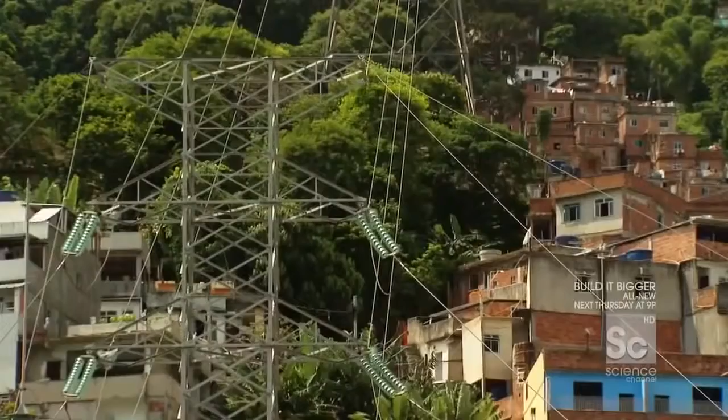Yes. The city has less than 4 years to generate enough energy to power 2 marquee events. Their solution lies 3 hours north of the city, where they're building a massive hydroelectric power plant deep in the mountains. So I've just arrived in the town of Sapucaia, and I'm about 100 miles outside of Rio. And this town, sitting on this body of water, that's the site for the new hydroelectric project. One of the largest infrastructure endeavors on Earth. The Anta and Simplicio project is a job site larger than Manhattan.

Workers here are reshaping some of Brazil's most difficult landscape in order to harness the energy from this, the Paraíba do Sul, a nearly 700-mile-long river that will supply the hydroelectric plant with enough water to fill 1,000 football stadiums. But the location of the river is the project's greatest challenge.

Now, the issue is if they put the hydroelectric plant right here, the reservoir required to feed this plant would cause a big flood. A flood so large that it would destroy all of the forests here and require this entire town and 2 others to have to relocate. So instead of moving the people, what they're going to do is move the river.

To save the town of Sapucaia, engineers are doing something incredible. Changing the course of 16 miles of this winding river in one of the largest water-moving efforts since the Panama Canal. Starting with a dam, they're diverting the river through 13 canals, 5 reservoirs, and tunneling through 7 mountains. Water will safely flow towards 3 of the most advanced turbines ever built.

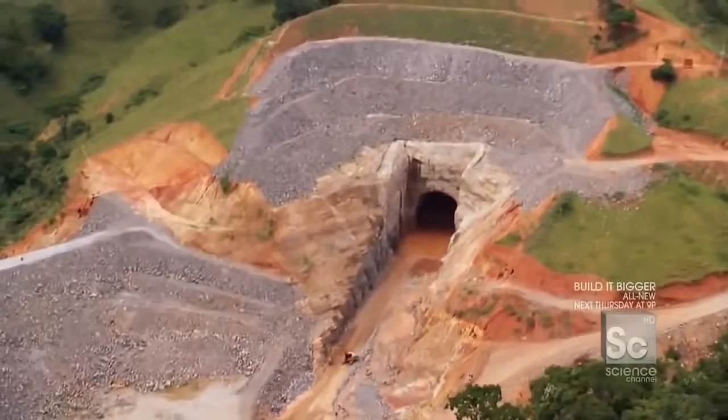Right now, I'm heading in to the mouth of the very largest tunnel. And having been in a number of tunnel projects before, I have never seen a mouth of a tunnel this big. Wow. This is the longest of 7 tunnels, spanning nearly 4 miles. And the further you drive in, the farther you get from daylight and the darker and weirder it gets.

In total, workers have to remove over 45 million cubic feet of rock, enough to cover Central Park in over 1 foot of earth. Going in. With the weight of a 240-foot mountain above, the team has developed a safe way to build one of the largest tunnels in the world.

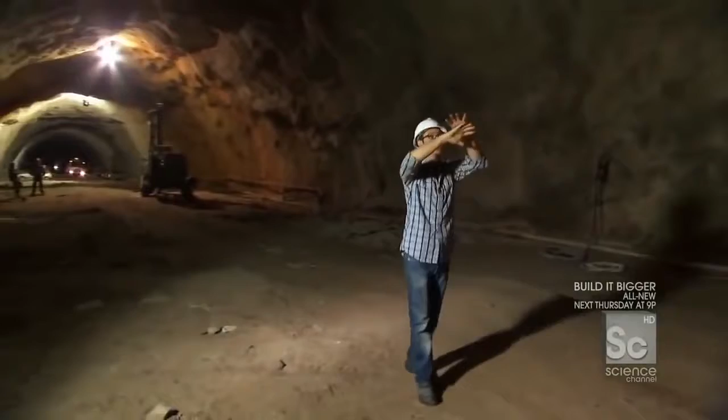It's a two-step process. Step number one is what you see they've already done. They blasted out this entire 26-foot tall semicircle. The second step is to go straight down. So basically, we're going to drill holes and blast down an additional 26 feet. Okay, and so how many holes do we have in this field right here? Here we have 52 holes.

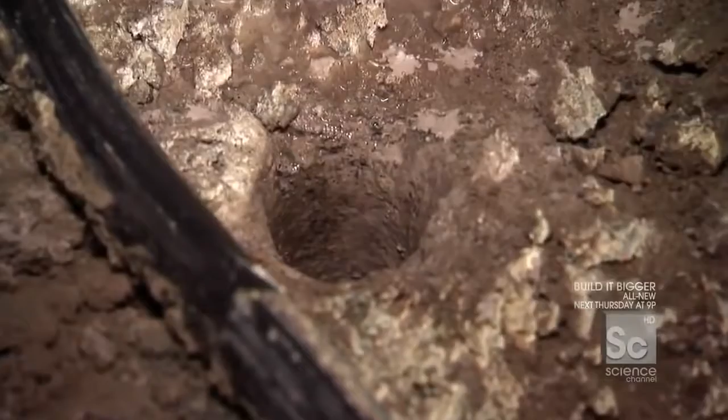52 individual holes. Yeah. And how much explosives are you putting into each individual hole? In the middle, we put 40 kilos per hole. So when we're done today, this will look like that. Correct. Exactly, yeah. We're not using a shovel to do it, are we? What we're using is a liquid explosive. Each 20-foot hole is filled with nearly 90 pounds of the stuff.

Okay, so Marcel, he's holding a hose connected to a truck, mixing together explosive liquid. Yeah, it's a liquid. It's a mix. So it's like you have to put in a little bit of oil, a little bit of vinegar, and you make an emulsion and it makes your salad taste good. This is different. It's not salad, it's a bomb. Correct.

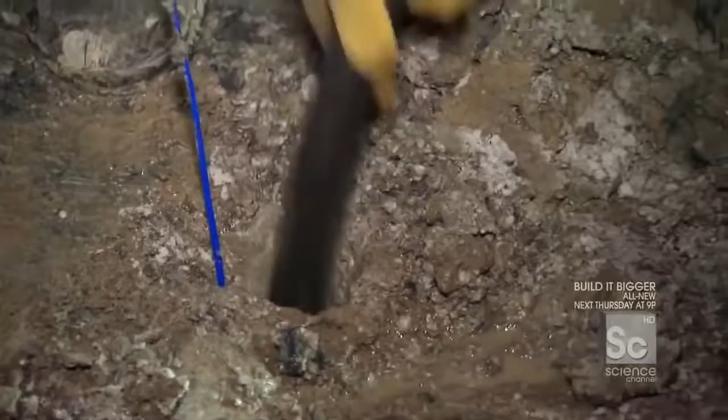Whoa, there she is. This kind of tapioca-like gooey substance is actually the emulsion, the liquid ammonium nitrate, the water, and the oil. This is a bomb. It's explosives. I have a hose full of it. All right, going down, all the way down. Made on site, this explosive liquid emulsion is more stable than dynamite. Okay, I'm at the bottom.

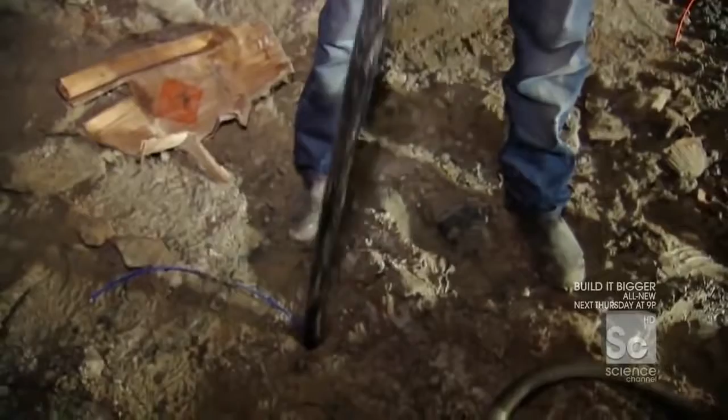Give me the juice. It fills all the empty space in each drill hole, giving the explosion the maximum force needed to break up the rock without causing a cave-in. So as the explosive comes out of my hose, we're slowly pulling it out, filling this thing up. Is it full? Yeah. All right, so now we have 52 individual holes. Each and every one of them is loaded with a fuse and an entire column full of this liquid explosives. Now, we're gonna tie them all together and run away.

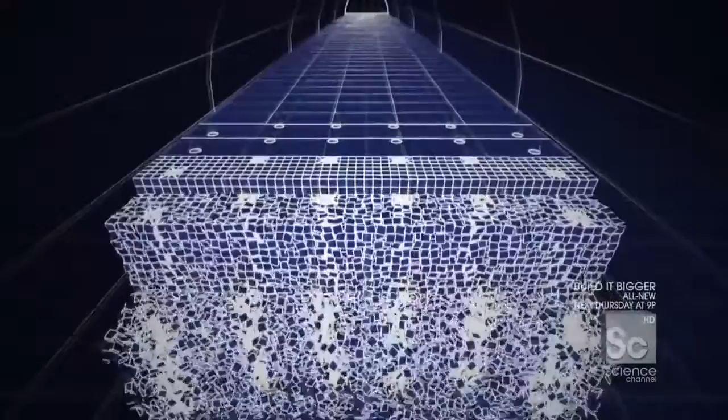The holes are dug in 5 lines. Blast engineers connect the fuse in each hole with a series of color-coded time delays. Once detonated, each line of explosives blows up in succession. Like a wave, it pushes through the next 30 feet of rock. Okay, so Kaido, am I looking at the plan right now? Are we looking down? Yeah. So this isn't just one gigantic bomb going off. No, we cannot do this because of the vibration. If you explode everything, you will shake the tunnel. Bad idea. Yeah, it's not a good idea. Not a good idea. All right.

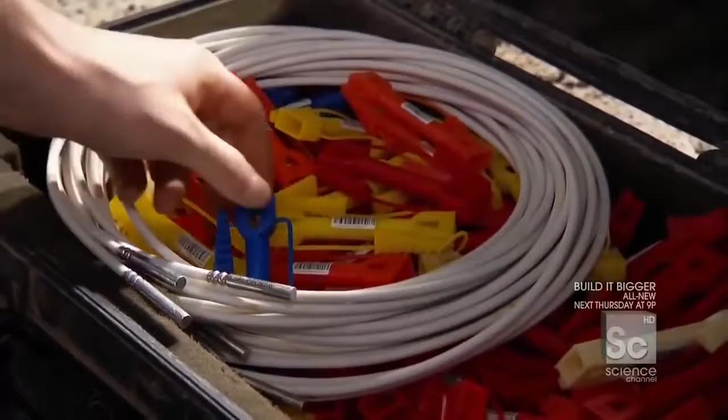Voila. Okay, so each color corresponds to a different delay. So which is which? 30, 30 milliseconds. 150. 150 milliseconds. And so basically by mixing and matching and combining these delays, we can kind of create the shape of the explosion we want. Yeah, that's it. All right, Jack Bauer, let's do it. This is what it's about, right?

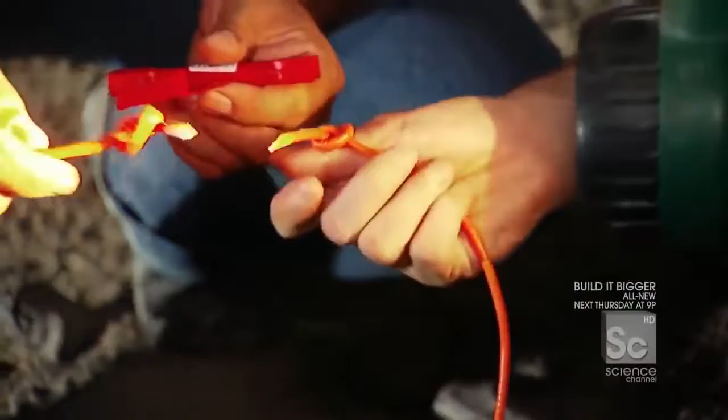Right below me is one column full of explosives. When it goes off, there'll be a 50 millisecond delay, then it goes on to the next hole. Okay. Stick it in, and now you can feel the wires touching the charge. And now I'll take this red piece, and it's in, okay? Live explosives. Let's get out of here. All 37 delays are now connected. The strategic blast pattern is ready to go.

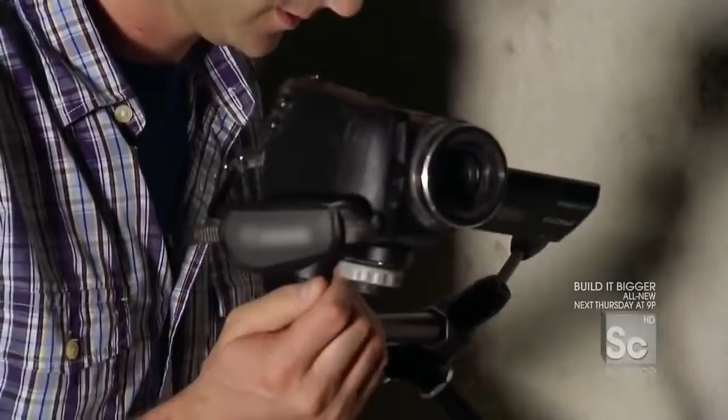So once we light the fuse, how long do we have? We have 7 minutes to leave the tunnel. Okay, so we're gonna evacuate the tunnel. Yeah. Getting all the lights, the crew, the gear, everything out. Yes, correct. But not everything is evacuating. The intrepid Danny Cam is gonna try and capture the moment for us. You see, the last time we tried this, our camera did not survive the blast. Hoping for a bit better luck this time.

All right, looking good. All right, you are set. All right, be careful where we step. Okay, that's a bomb. That's another bomb. Okay, so in my hand I have a stopwatch with 7 minutes set for the blast time. In my right hand, I have a lighter. Both are required to safely detonate a tunnel. So, okay, here we go.

Fuse is lit. Come on, come on. Philippe, get in the back, hold on tight. Jay, get inside, quick. Philippe, you're good? All right. Lights on. All right, here we go. Oh, emergency brake. The mouth of the tunnel is over 2.5 miles away, making it almost impossible to reach in just 7 minutes. We're gonna make a left here. Oh, good thing they told me that. Okay, gotta change gear. Sorry, dude. Our only way out is a small access tunnel located a half a mile from the blast site.

This is ridiculous. So I'm actually driving as fast as I can, but the roads are really crappy, so the idea is don't get a flat. Oh, come on. Come on. There it is. We're almost there. I can see the light. A minute and a half to go. Come on, car. Come on. Get up there. Come on, damn it. You okay, Philippe? Yeah. Woohoo!

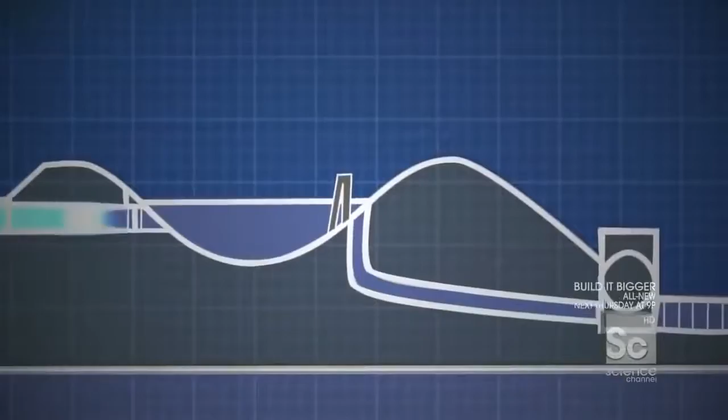To keep the lights on, the Anta and Simplicio hydroelectric project will supply nearly twice the energy that the city needs for the games. To generate that much power, workers are moving a massive river through a series of tunnels and canals, channeling all that water to an intake valve that directs the river to a powerhouse. As this enormous wall of redirected water comes out of the final canal, it now meets something called an intake, which is essentially like the drain at the bottom of a really big bathtub.

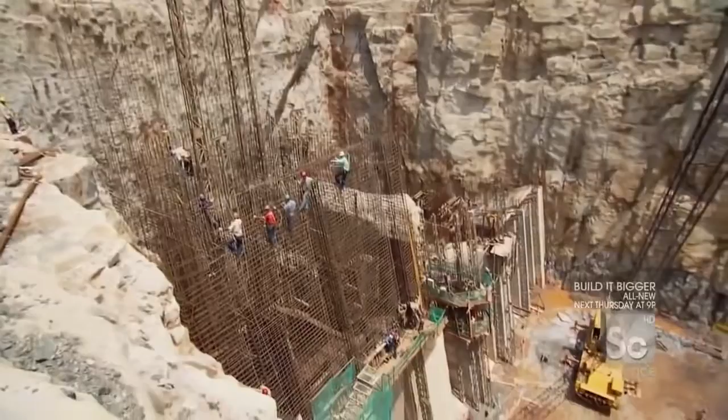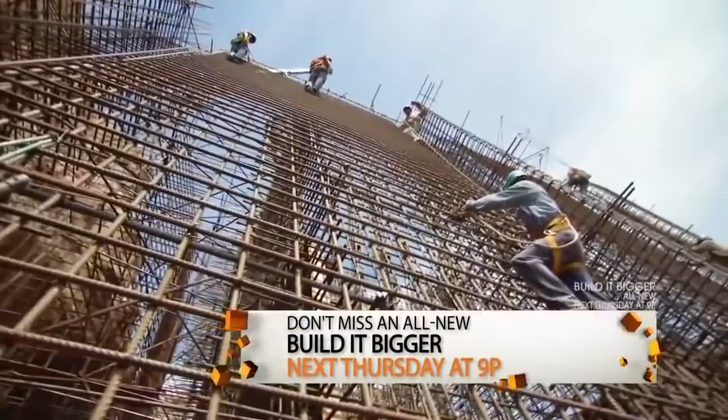But while the water drains out, something else has to hold back all that remaining water. Now we're talking about 780 billion gallons of water. What can hold back that much water? Well, it's gotta be a really, really big wall. This massive wall is over 100 feet tall, covered in over 4,000 tons of concrete. Its core is reinforced with nearly 75 tons of steel rebar, making it 100 times stronger.

So at this height, I'm basically at the midpoint of the intake. Water would be going in below where I'm standing, down into the hole. But up here, the wall that's holding back the rest of the water is right here. And the guys that are actually building this thing, giving it its strength, installing its rebar, well, they're doing that up there. Well, here we go.

We're off. This is one of the hardest spots to reach on the entire job site. One tied off. Workers have to climb a steep 79-degree slope. Not looking down. 10 stories up. All right, last couple. Okay. Woo! Top of the summit.

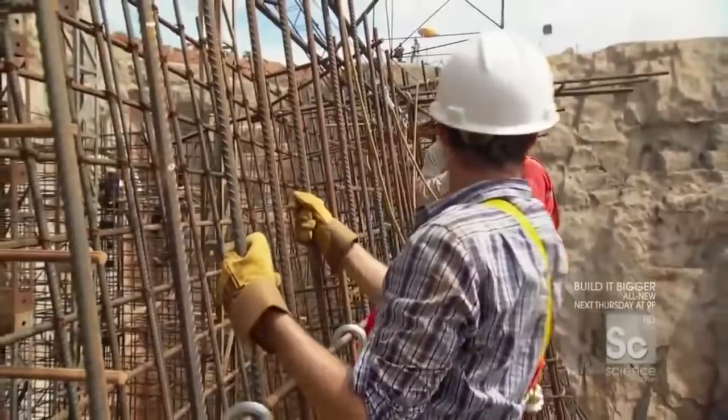See? So the crazy thing is, at the very height of the wall, the way to get more rebar up to us so we can finish this wall is like that. There's no room for a crane at the top. So a team of 6 workers hoist each 65-pound piece of rebar. Holy, you gotta be kidding me. Using nothing but 160 feet of rope.

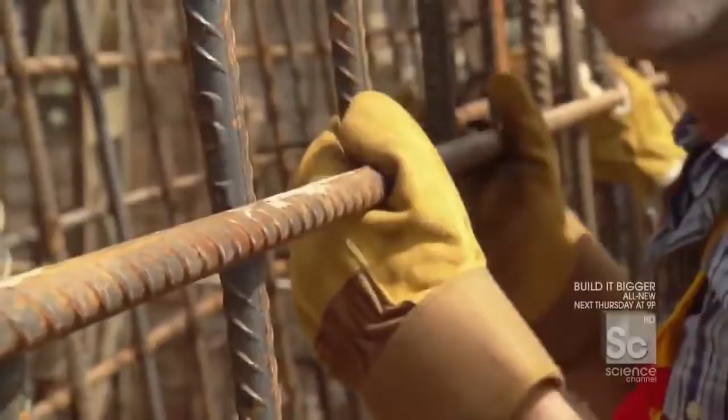All right, okay. Watch out, watch out. All right, coming down, watch your shoulder. Come down by me. Okay, we're at the right height. And now the rebar is generally where we want it, now we put on those series of rebar ties to connect this horizontal piece to this vertical piece.

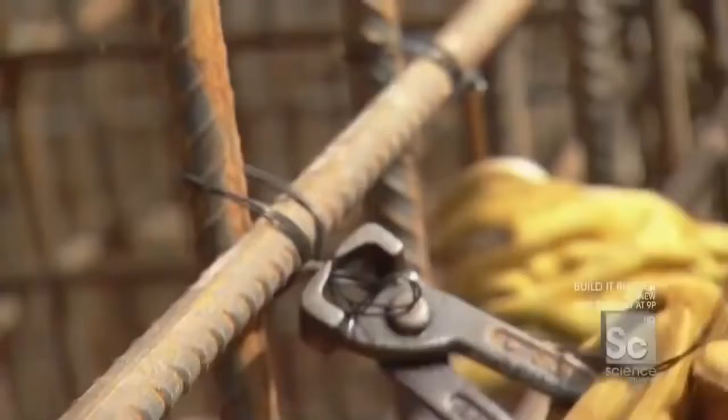Around the top. Bring in the tool, twist. When finished, this crew will tie together almost 5,000 pieces of rebar, creating a massive grid with over 17,000 joints that will stop a river in its tracks. Nice. Good stuff. Yeah!

So, why is everyone so happy? Why so much woo? Today is Saturday. Today's Saturday. I see. Which means tomorrow's no work. No rules. Got it. All it takes is a day off. Brazil just blows up. There it is.

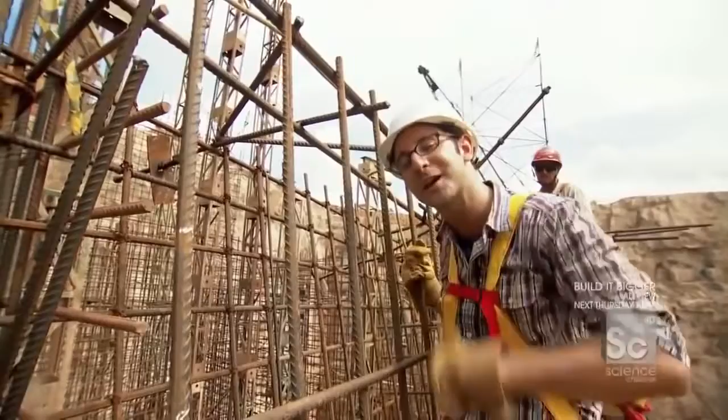Oh my God, it's like a prison break out here. Well, it just goes to show just how hard these guys have been working. 6 days a week, almost 16 hours a day to build what will be one of the most important pieces of infrastructure ever to be built in Brazil. And why? To make sure this city, when it houses both the World Cup and the 2016 Olympics, they don't have a blackout.

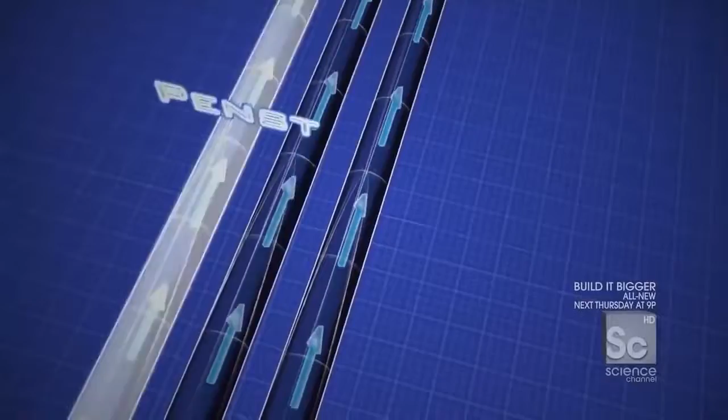Engineers expect a wall of water nearly 100 feet deep to barrel into the intake wall. After the water passes through, it drains at the base of the wall and enters 3 underground tunnels called penstocks, which begin with a 10-story drop to speed up the water. It gains momentum down a 7-degree slope, rushing towards the turbines. The faster the water, the more electricity they generate.

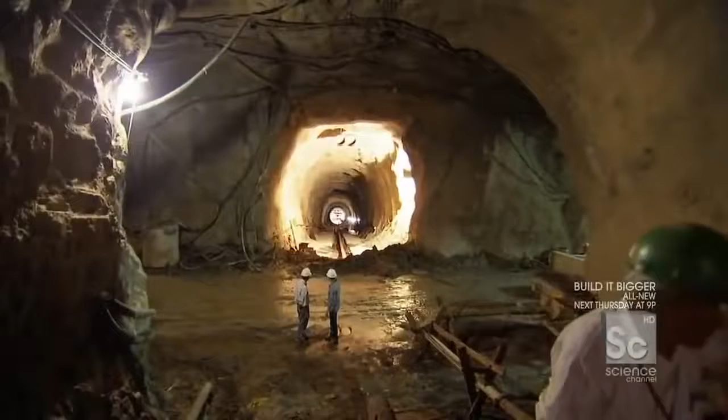So that's the turbine down there. Yes. And the central idea with the penstock is to do what to the water? Increase the speed and the pressure. Both needed to move the turbines. And so the water's moving how many meters per second? 10 meters per second. 10 meters per second, so that's like 20 miles an hour. Yes.

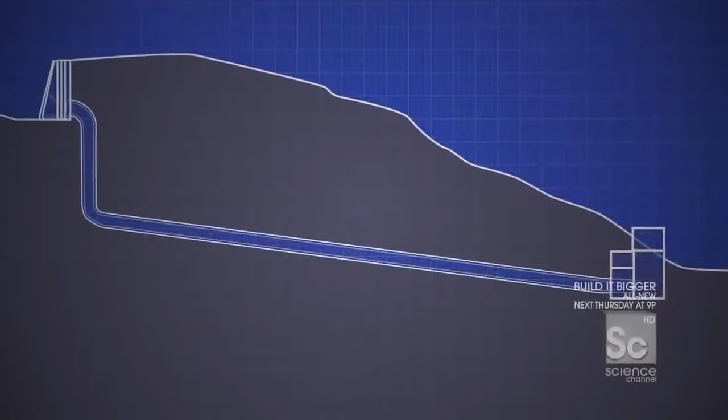Water moving that fast would tear away rock from the walls and ceiling. Its force is stronger than a massive ocean wave and capable of causing a tunnel collapse. To reinforce the penstock, workers line the final 350 feet with 50 massive rings, totaling 800 tons of solid steel.

Now, one of the fascinating parts of this process is they're moving a big, heavy object, but they're not using a crane because we're in a tunnel, right? There's no room for a crane. So rather than having a crane operator, we have a truck driver and an angry one. Let's go meet him. All right, here we go.

Hello, sir. How you doing? You know me? Anderson. Anderson. Isso. I'm Danny. Danny, nice to meet you. Are you nervous? 'Cause it's a heavy piece, we're in a tunnel. Devagar. Keep it cool. Let's do it. Rock and roll. All right.

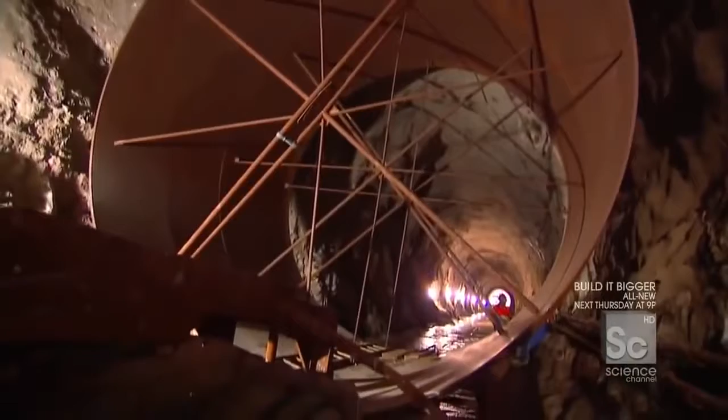The ring is attached to a trailer and is more than half the weight of the truck. It'll take everything this truck has to get it into place. Okay, so Anderson wants to crank the RPMs up because he's actually going to want a ton of torque so the weight of that steel piece doesn't actually drag the truck backwards. So he's letting the engine tune up.

Also, I might add, from afar, Anderson, very tough exterior, kind of tough truck driver appeal. But here in the cab, this guy's a teddy bear, huh? There he is. He loves it. He loves it.

All right, here we go. So we're popping it in gear. Wow. I mean, Anderson is basically smacking into the back of the steel ring and quite literally pushing it. It's a kind of a tight fit. Uh-oh. Oh my God, look at that. I think we're stuck. Are we stuck?

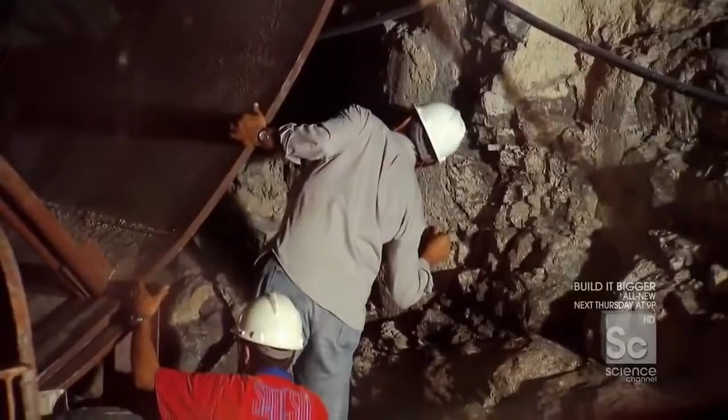So what happened? Esbarrou na pedra. You hit it? Is that okay? Agora tem que pegar a máquina, puxar. Smacked it. Well, it happens. I mean, if you're basically parking an enormous truck with a gigantic 16-ton steel tube, you might hit the side of the garage. Anderson did. It happens. Let's go check it out.

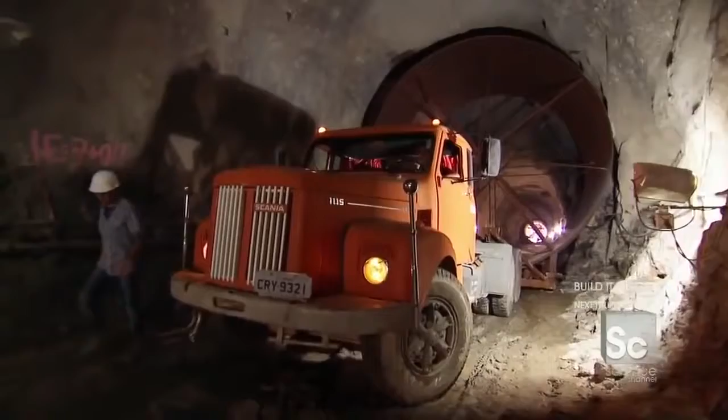It takes 3 days to secure each ring to the tunnel wall. And the crew has 3 penstocks to complete and another 146 rings to install. But for now, this operation has come to a grinding halt. So there's a flange on the outside of the steel that kind of protrudes out, and that flange somehow has gotten behind this bump out of concrete. So not only is it stuck on the side of the wall, it's actually blocking itself from getting unstuck. We're gonna be here for a long, long time.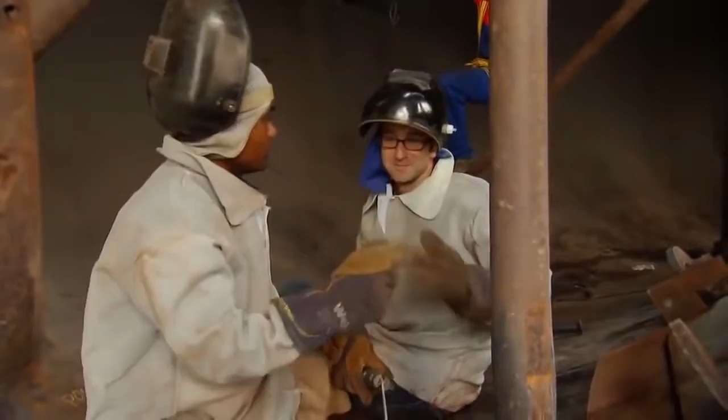Up next, sealing the most advanced turbine ever built with a 3,000-degree welding stick. Sorry. Right. If you touch the rod to any metal.

Brazil is the third largest consumer of electricity in the Western Hemisphere, with usage doubling in the last 25 years. This country is turning to its greatest resource, water. There are many different ways to make the electricity we need to power our cities. You can burn coal, you can burn oil, you can build a nuclear power plant, you can have a wind farm, even a solar farm. Now, for a country like Brazil that has 1/5 of the world's fresh water, a water solution makes obvious sense.

The Paraíba do Sul is one of over 120,000 rivers in the country. And for the last 3 years, workers have cleared a new 16-mile path through 7 mountains, removing 650 million cubic feet of earth, all to bring that water to 3 of the most advanced turbines ever built.

We are now at the final leg of this race. The water, now traveling at its maximum speed, is going to come barreling out of the steel casing, which will ultimately connect to this right here. This thing behind me is called the spiral casing, and this is where the water finally makes electricity.

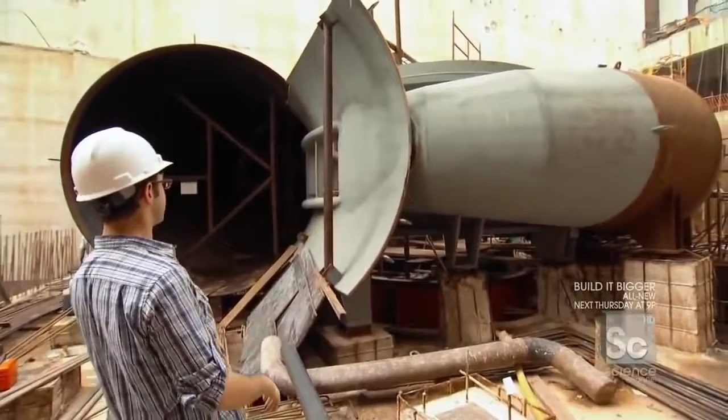It's going to spin around this, pulling a 360-degree turn, all the while rotating the blades of the turbine. The turbine acts essentially like a water wheel. As water rushes around the spiral case, it pushes 13 angled blades, spinning the 35-ton turbine and generating power. The challenge: keeping the water from losing speed as it flows around the tube.

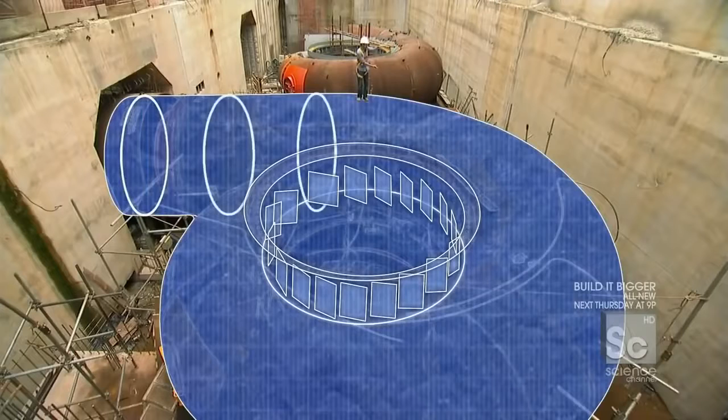The answer is the same thing that we use when we're washing our cars with a garden hose, right? If you pinch the garden hose, the water goes faster, right? So if we decrease the diameter of the hose, we increase the speed of the water. Same principle, just much bigger. The water comes into the spiral casing at a diameter of 13 feet. And as the water goes around the curve, the tube gets progressively smaller, starting at 13 feet and ending at 4 feet. So when the water comes in, it travels the exact same speed all the way around the circle.

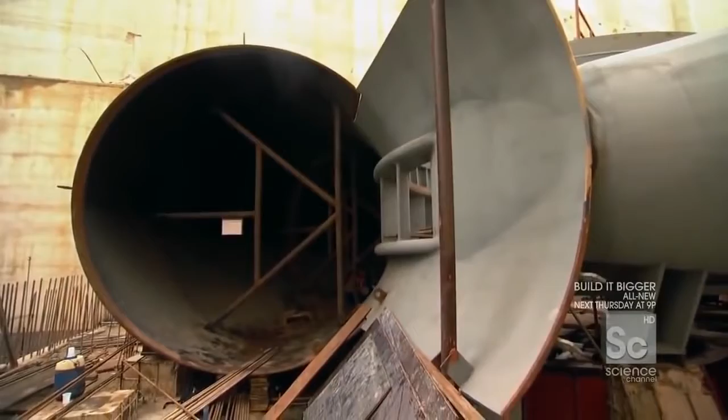The 62-ton spiral case is actually composed of 70 steel plates. Coming in, here we go. Okay. To make the turbine spin evenly, it must be turned into one smooth, frictionless surface by a team of 4 welders. All right. Your name? Cosme, I'm Danny. Cosme, you're the welder, huh? So what Cosme's up to is he's welding on these pad eyes. We'll put one on this piece of steel, we'll put a second one up on this piece of steel, and we're gonna bring it together in order to close the gap between 2 pieces of steel, weld it up, and make it one smooth, curved surface.

Okay, let's do it. Gloves? Cosme's welding stick burns at 3,000 degrees. And to protect against flame and sparks, these guys wear welding jackets made of fire-resistant leather.

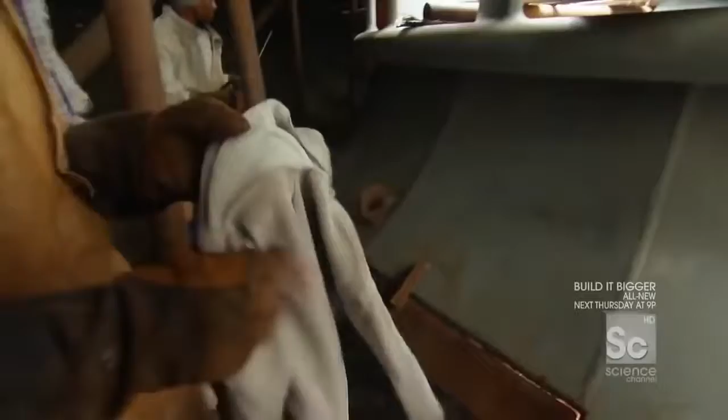Beautiful. Okay. All right, you show me how it's done. Put one arm in. And then put the other arm in. Cosme, are you showing me how to put a jacket on? Is that how much faith you have in my abilities today? All right. Oh, right. Sorry.

Right. If you touch the rod to any metal. These pad eyes are welded onto each steel plate to act like an anchor when they pull the steel together. All right, gotta get it in there tight. Get a nice little bead going right there. Good motion. Look at that go. Cosme! How was that? That was good, huh? Did I do okay? What do you think?

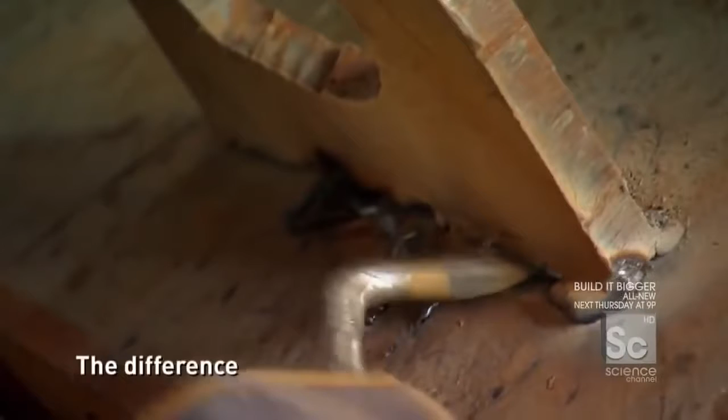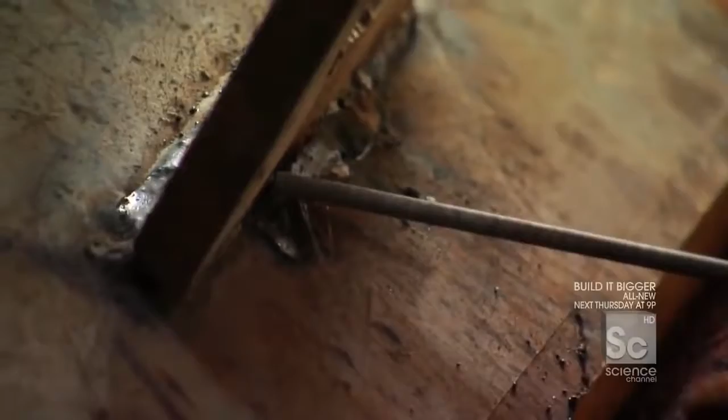The difference between yours and mine, yeah. That was hard. These panels will be pulled so tightly that each pad eye must endure 18 tons of force. So we're gonna have to have more weld. All right, so Cosme's gonna have to finish the thing up.

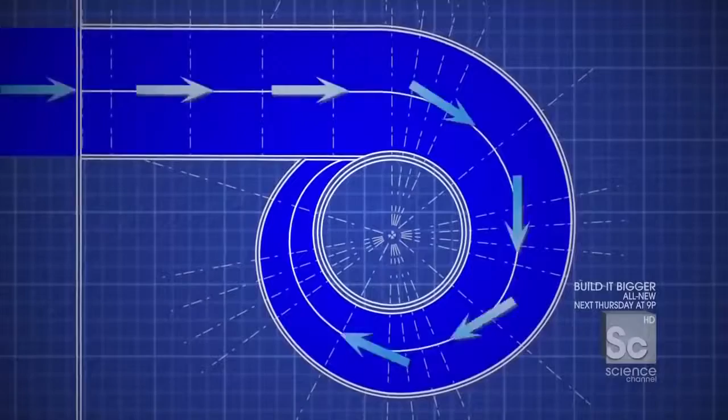Now, next step is the guys will put chain blocks onto that pad eye. Once we put tension in the line, we can pull the pieces of steel closer together, because in the end, they're taking these different individual curved segments and making one long curved tube that lets the water rapidly turn around and spin the turbine. 79,000 gallons of water will rush through the spiral case, with nearly the same force as a rocket during liftoff. Powerful enough to rip the 1-inch thick steel plates wide open.

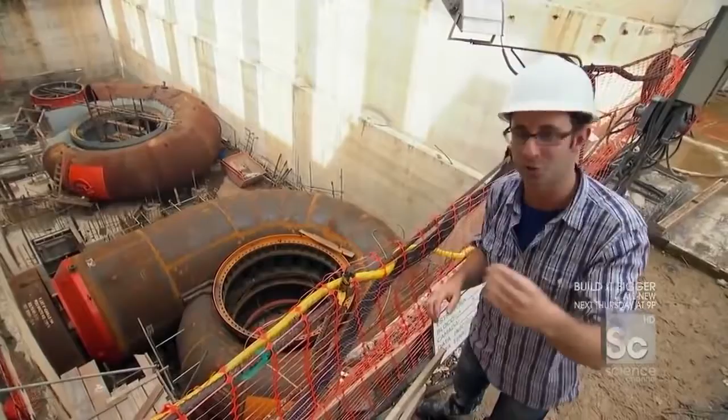Now, to prevent that, the crew must entomb all 3 cases in over 2,000 tons of concrete. But they have to first make sure the cases don't leak by filling them with water. The problem is, you can't fill it with water if you have holes in it. So right now, what we're gonna do is plug up the holes of that donut to let them fill it with water. We're gonna do that with this big cylinder right here. The plug is actually a 32,000-pound steel ring. All right, let's shackle it up. And once lowered into place, it will seal up the spiral case, making it watertight.

Okay, so everything in Portuguese is different from English, even the crane operator instructions. So, for example, going up with the crane? Para cima. Cima. Para cima. And for going down? Para baixo. Para baixo. All right, so he gives us a thumbs up. Okay, bring her up. Here she comes.

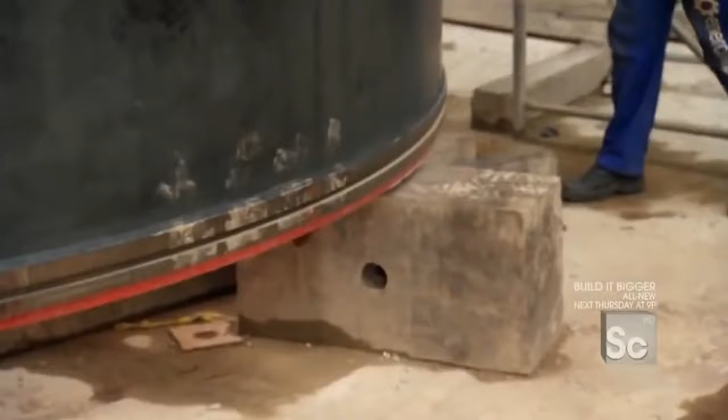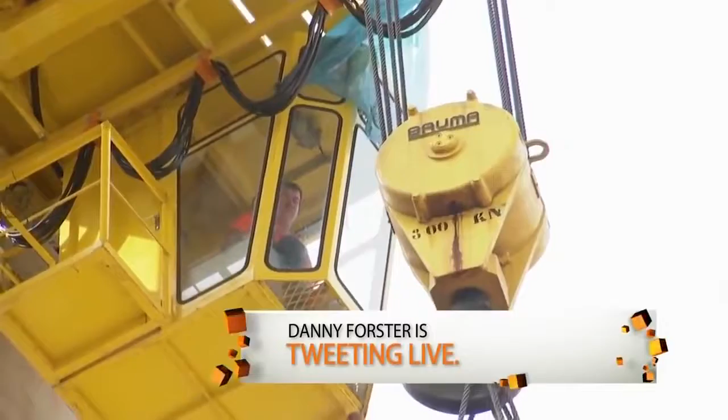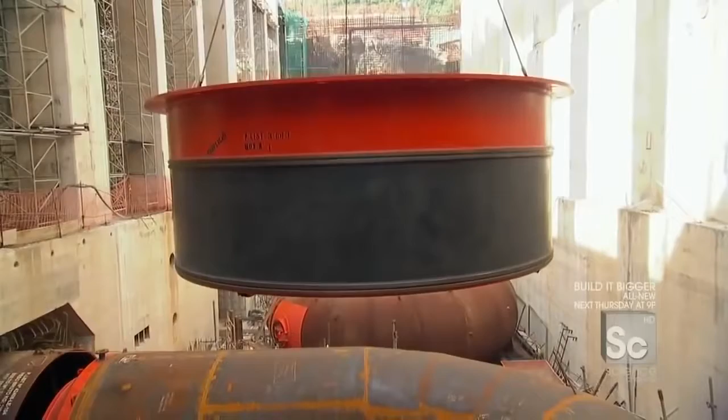16 tons, wide load. All right, clear the way, we're gonna start traveling. Now, one of the key things to keep in mind when you're flagging a crane operator, no matter where the piece is, no matter where you are, you have to maintain visual connection with him at all times. So, as the piece moves, I have to move with it to make sure we're always looking at each other. And now for the delicate part, we're over top the spiral casing. Each spiral case takes workers 2 months to assemble. Very slowly. And if this solid 16-ton load falls, it would crush the case like an empty soda can.

Now I have the piece above the hole. There's moments of more progressive refinement. We got it this far, and now we're gonna get even closer as the piece gets closer to its final position. Okay, here she comes. Come on down. And now for the final few adjustments. Here, literally, millimeter by millimeter. You can see it's just gonna clear the threshold with absolutely no room to spare.

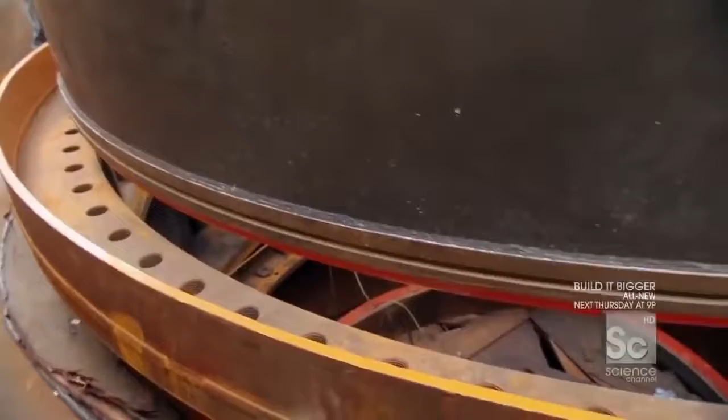Look at that. With only 1/64th of an inch of clearance and a crane operator perched 90 feet up, there is no room for error. Come to me a little bit. Keep it coming. Stop it right there. Good. All right, so now we are lined up all around. The circle should fit into the hole.

Check it out. Everyone seems happy, so we're good. We're successful. Obrigado. Cool stuff. My first time operating a crane via hand signals. Did a decent job.

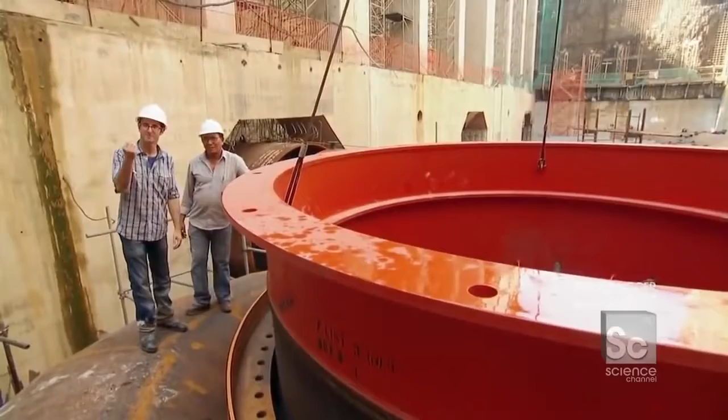Coming up, clearing out nearly 4 miles of canals. So these are the explosives right here. Calls for some serious firepower. Oh, the noise is so bad. You can hear it's like bomb-on-bomb action. But first, how many hydroelectric dams are located in the entire country of Brazil? I'll tell you the answer after the break.

Here is the trivia answer. Brazil has 450 hydroelectric dams, more than twice as many as in the entire United States. Rio has 1.3 million people living in slums called favelas. 20 years ago, these neighborhoods had no electricity. Today, their power comes largely from direct taps into city power lines, an extremely dangerous power source. But thanks to the 2016 Olympics, this situation is about to radically change.

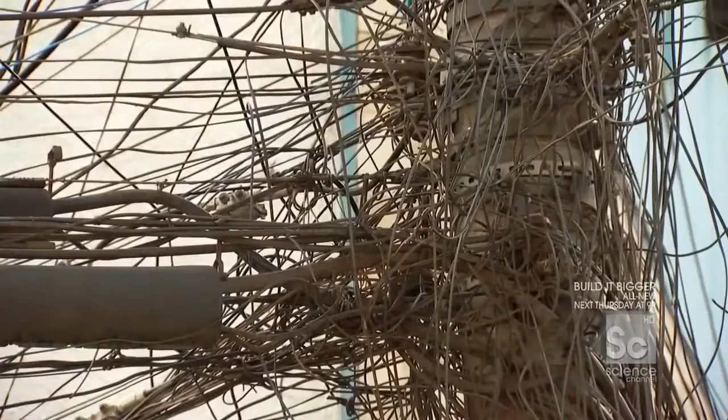One of the more fascinating reasons why Rio beat out their competition of Madrid, Chicago, and Tokyo is that winning the Olympics isn't just about showing off a shining, gleaming city, but rather it's also about using this as an opportunity to transform a place. So this favela, one of the poorest neighborhoods in Brazil, is also going to benefit from the games. All the new infrastructure, all the new construction, all the new housing will affect this area. So winning the Olympics isn't just about sports, it's also about transforming a city.

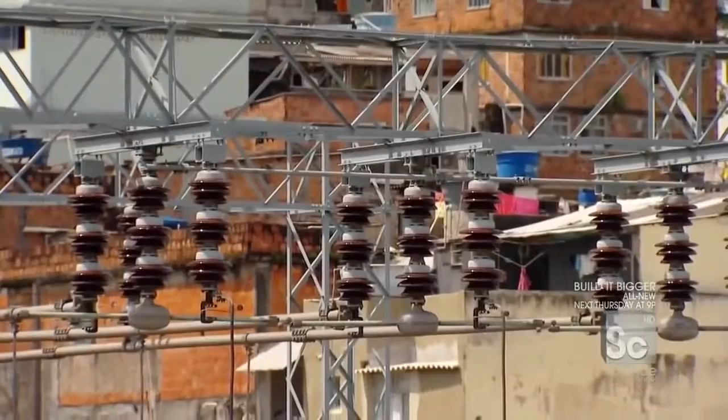Brazil is spending $14 billion on new infrastructure, changing not only the favelas, but the city's entire power grid, starting with Rio's aging open-air electrical substations. So, Rodrigo, this substation is in downtown Rio. For example, that's a condominium right there. That's an apartment building. People are living all around this thing. Yes. This is totally open? Yes. It's not good.

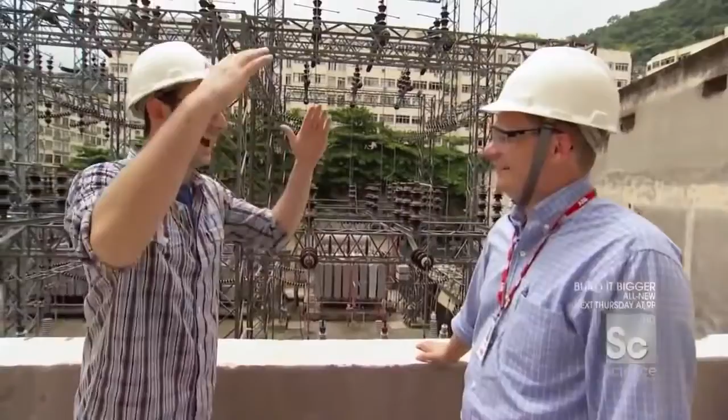It's very dangerous. But mainly, the problem is it's more vulnerable because you are exposed to birds, animals, the ocean salt, rain. All of them could generate a blackout. So everything from salt from the ocean, the rain falling on this thing, even a pigeon could fly into the substation and the lights go out. Yeah, it's not a good situation. This is not a good situation.

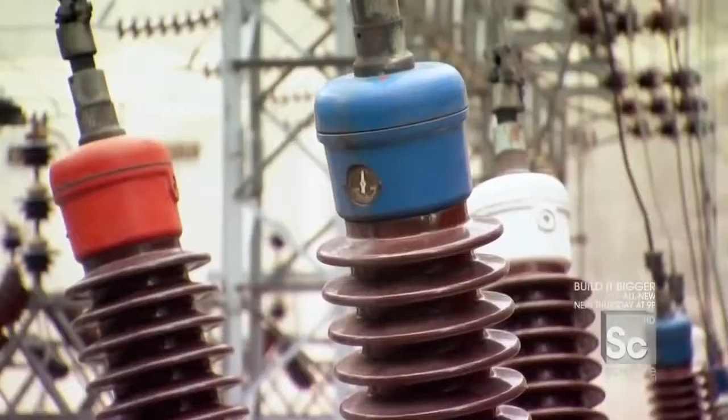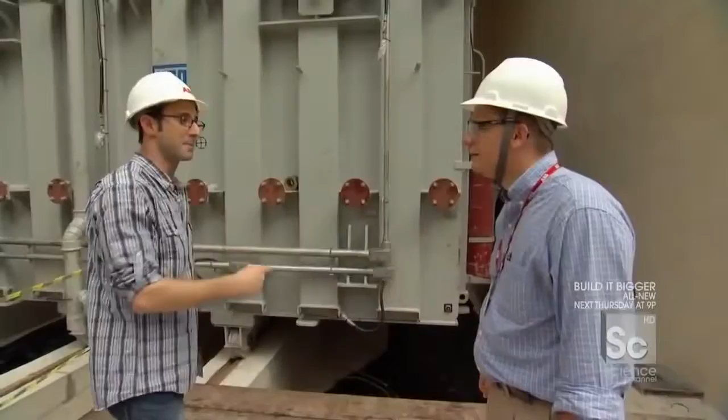The 3 transformers in this 50-year-old substation step down the voltage, making it safe for use in the home. They're being replaced with 3 brand new ones, much smaller and safer. And this, what I'm looking at right here, is the actual transformer. Yes. So we have 3 of these, and they're able to make the same amount of power as this entire old substation. Yes, it's the same power, all of this substation inside this roof and all covered. So it's smaller, it's more efficient, and it's covered and protected. I like it.

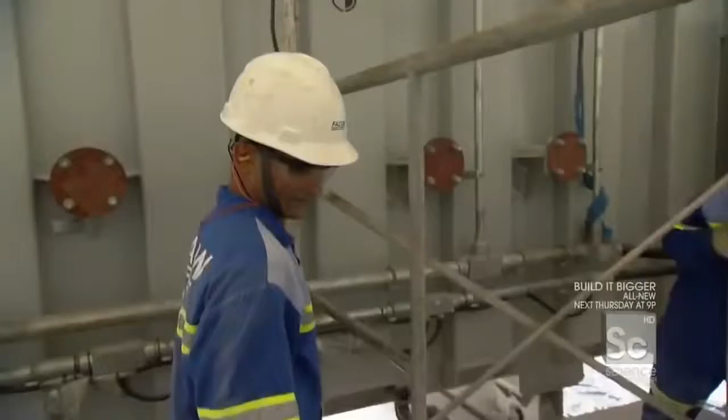Each transformer weighs 77 tons. It's not on, right? He's not going to electrocute me? No. And it took the crew and their truck 3 days to move it off the street. Now, just feet from its final destination, there is no room for a truck. Okay, Guilherme, explain to me our situation, because we're standing inside of the transformer bay. Yes. But there is no transformer.

No, not yet. But we're gonna pull this transformer, and you're gonna do this. I am gonna pull a transformer. Yes. By hand. My hands? Your hands. I can help you, but I think you can do it. In order to do it, we're just gonna... Yeah, you just have to pull it. Just give a little.

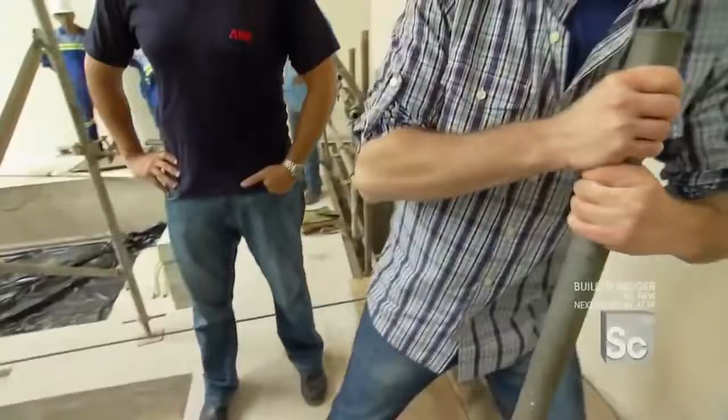And that's it? Yes. For what? 6 months? Each transformer has to be dragged the final 17 feet using a ratchet pulley system. You can do it, man. It weighs more than a tank, and each crank moves the transformer just 2 inches.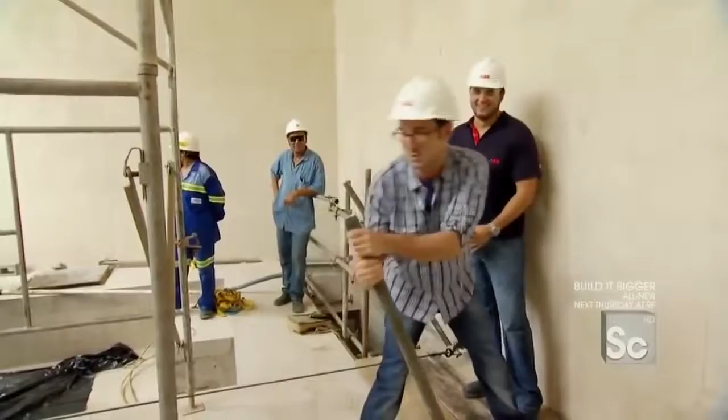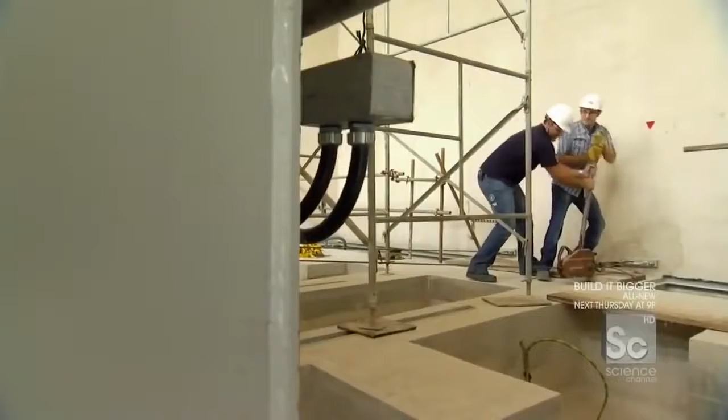It takes 102 strokes of the ratchet to cross the finish line. Oh. Looking good. There it is, transformer in place. Moved about 17 feet. How? On the backs of champions. In the next 4 years, 50 more substations like this one will be upgraded, bringing power safely into homes. But getting the power to these substations presents an even bigger challenge.

Brazil is a country that gets almost all of its power through hydroelectricity. And it would make sense that a hydroelectric plant would be located where the water is. The largest source of fresh water on Earth, the Amazon River Basin, is in the far northwest of Brazil. But 3/4 of the population live on the opposite side of the country. Connecting the 2 regions is a massive network of power lines, spanning over 3,000 miles.

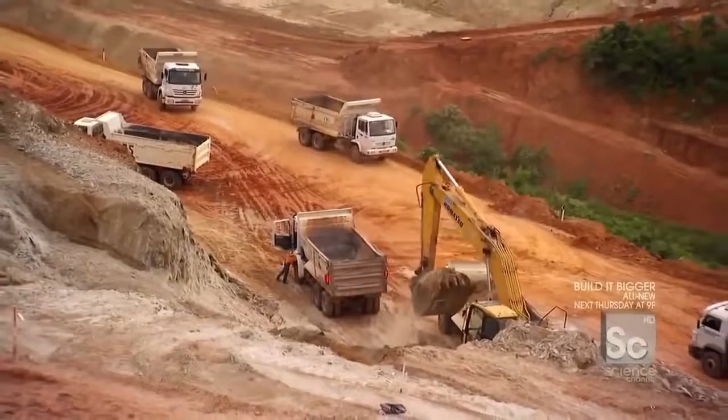The issue is those power lines are really expensive to build, they're inefficient, and most problematically, they're vulnerable. You're looking at a series of opportunities for blackouts. Rio gets most of its energy from a power source nearly 1,000 miles away. But now, just 100 miles from the city, engineers are attempting to harness power from the Paraíba do Sul River by carving a new path for the water through 16 miles of mountains and valleys.

The 16-mile journey that the water takes from the dam to get to the powerhouse takes it through 7 individual tunnel segments. There are 5 separate reservoirs, and here where I'm standing is the last and final canal before it goes into the penstock and into the powerhouse. The problem is, naturally, this canal is not wide enough to accommodate that much water. So what do we do? We're gonna take that rock face and we're gonna blow it up.

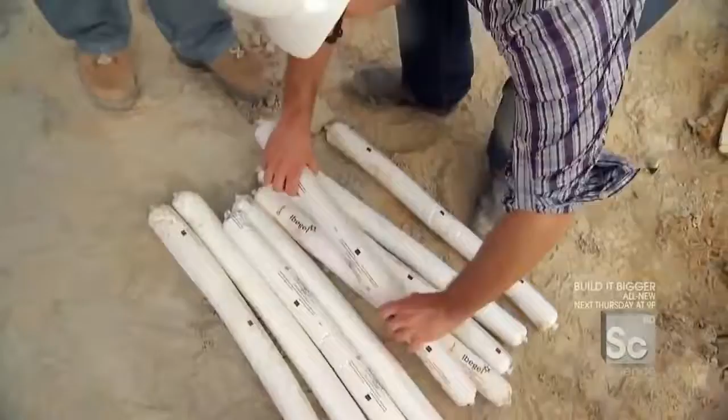So we're gonna take this down to that level, and how much further are we going down? 10 meters deep. 10 meters deep, so about 30 feet straight down to create essentially a bigger bathtub. Yes, that's it. Let's do it. 30 feet deeper means clearing nearly 6,000 tons of rock. So these are the explosives right here? They're using over 2,300 pounds of explosives, enough blasting power to hit a 2.0 on the Richter scale.

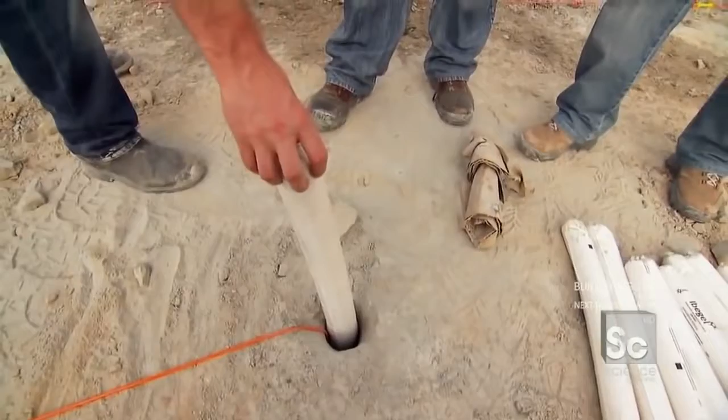And we're going to lower this down the hole and essentially just fill it with these white sausage-like explosives. See. Let's do it. One at a time. Just drop them in, one at a time. Yeah. It's okay to drop them 30 feet. There's no risk? No problem. Not at all. Oh, the noise is so bad. The noise, you can hear it's like bomb-on-bomb action. Each hole is filled with 50 pounds of explosives. And we're in. We're good.

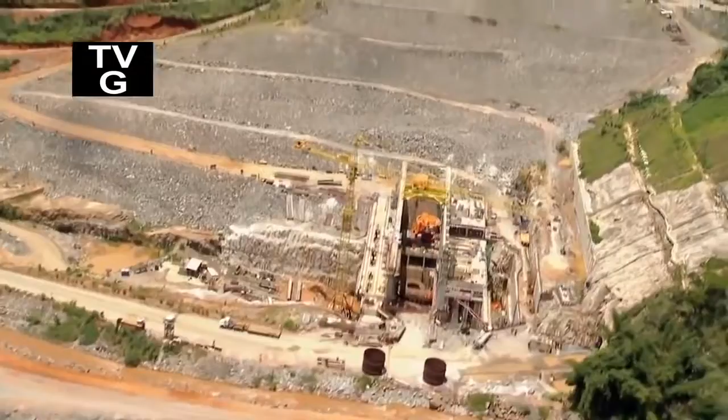Coming up, we gotta go, come on. We have only 3 minutes to escape from the biggest blast I have ever seen. You okay? You're driving like maniacs. Get out of here. Just 1,600 feet of rock separate a river from this hydroelectric powerhouse that could end Rio's energy problems. Nothing that 1 ton of explosives and a fuse couldn't solve. Okay, so right here, 150 centimeters equals how many minutos? 3 minutos.

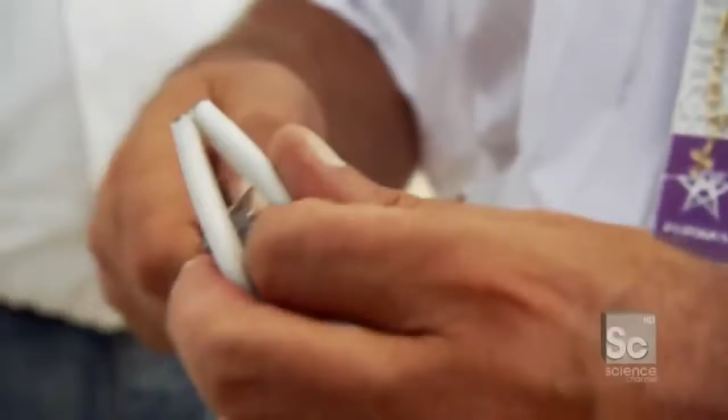The blast will send nearly 6,000 tons of rock flying throughout the valley. The 3-minute fuse leaves us barely enough time to safely clear the blast zone. So the cars are now backing up. All 4 doors open, so as soon as we light the fuse, pack in the car and go. Yes. Okay, it's like a movie. It's like Cannonball Run here. All right. Yeah, as fast as we can. As fast as we can. Okay.

That's cool. The area's being cleared. The siren is going. We're gonna light this fuse, and that literally means we'll have 3 minutes to run into that car and get way away from here, because within 3 minutes or so, this entire rock mass will start flying in the air. All right. Set? All right. Fuse is lit. We gotta go. We gotta go. Come on. Come on. Watch your step. Come on.

You okay? You okay? You're driving like maniacs. Get out of here. Oh, boy. Go, baby, go. All right. No stop signs now. No stop signs. Let's go. Let's see, minus 1 minute to go. We gotta get 1,500 feet away from that blast. Work that. All right, we're good.

We should blow any second right now. Holy. One very large explosion just went off. I think we're gonna find that entire side of that rock face is no more. Well done, fellas. Everybody's alive. Nicely done. We're now going right back into the blast. Look at this. All this white smoke, the debris. It's like we're driving on Mars.

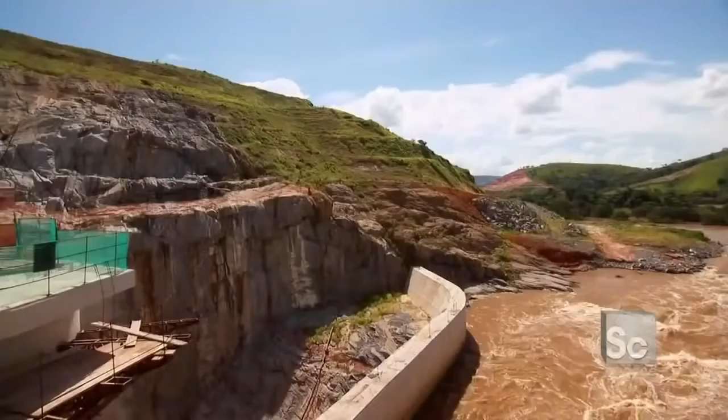It'll take 53 more blasts to shape this 115-foot wide canal and bring 780 billion gallons of water to the powerhouse. The next challenge, keeping it that wide. The issue is, this massive earth-moving operation is man-made and will, over time, begin to erode. So today what we're gonna do is apply a system to the side of this canal to make sure no matter what happens, it stays put and does not erode over time.

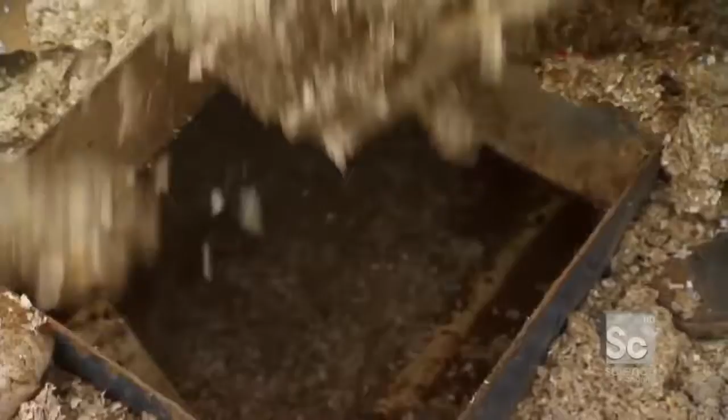To prevent rain from eroding the sides of the canal, should we head up? Yep. The team must spray the hills with hydroseed. The homemade solution starts with water, soil, mulch. Yeah, there we go. And a special blend of local grass seed. These are the seeds right here? Yeah, they have about 7 species. So it's this mixture, this blend of seeds that'll actually enliven the soil, give it some strength, and minimize that erosion. Yeah. All right, here we go.

Finally, they add a natural fertilizer. This is the good fertilizer. Yeah. This is organic, healthy. Is this poop? It's poop with soil, but it's organic, you know? Yeah, it's poop. Organic fertilizer. What did I think it was? All right, so we have our 7 different kinds of seeds. We have our 4 bags of mulch. We have 5 bags of organic fertilizer. Are we done? Are we ready to shoot? Ready. All right, let's mix it up and shoot some seed.

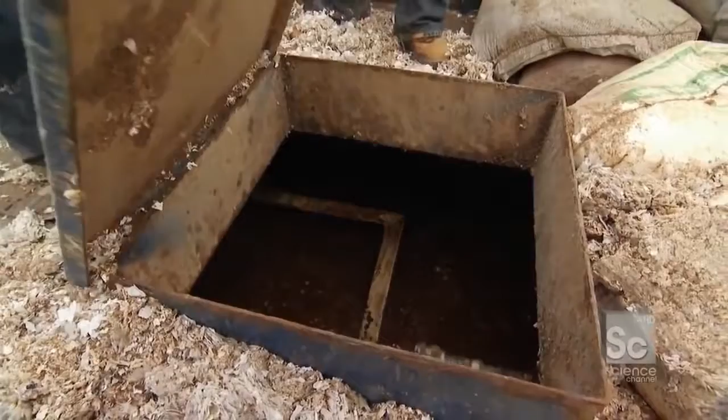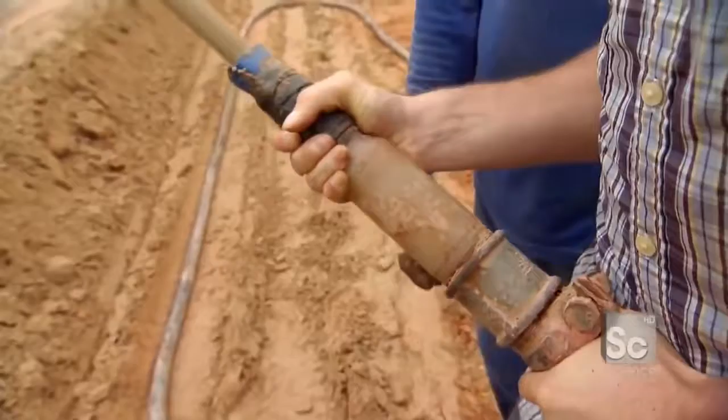Ultimately, the team has to spray hydroseed over 5 million square feet of land. Nearly enough grass to cover Times Square. Oh, yeah. Workers use a hose with 80 pounds per square inch of pressure, spreading over 2,000 gallons of hydroseed in just 30 minutes. Here's the handoff. I'm stepping in. Hang on. Oh, wait. It's taking me. My God. Yeah, I got it. I'm fighting a freaking boa constrictor. Come on. Okay. I got it now. There it is. Don't make it a battle.

The crew has just 4 months to complete all the hydroseeding before Brazil's dry season sets in and the grass won't grow. So in just 2 months' time, I'm going to see plants that big. Exactly. And it's that grass planted on that hill that will keep the slope in place, minimize erosion, and let that water flow from this side all the way down towards the power station without interruption. This is one of the final steps in a 4-year effort to divert a river through an incredible 16-mile system of tunnels, reservoirs, and canals, all so that a powerful flow of water reaches 3 turbines, giving Rio the chance to show the world their incredible city during the upcoming Olympic Games.

Rio will be a radically different city as a result of these games. Yes. It's not just about sports, is it? No, it's much more. Actually, sport is the driver, is what catches the attention, is what catches the passion. Right. But below that, there's much more happening.

Rio de Janeiro is going to host both the World Cup and the Olympic Games within a 2-year window. And because of this incredible honor, they're going to build new roads, new housing, and new infrastructure, and really change the city. But for me, what makes this hydroelectric project so exciting, even beyond the incredible engineering, is that they're going to give Rio not just the electricity they need, but also the confidence to hold these incredibly public events and do so without the fear of a blackout. And if Rio can pull this off, they're going to change not just the physical landscape of their city, but also the image of their entire country.